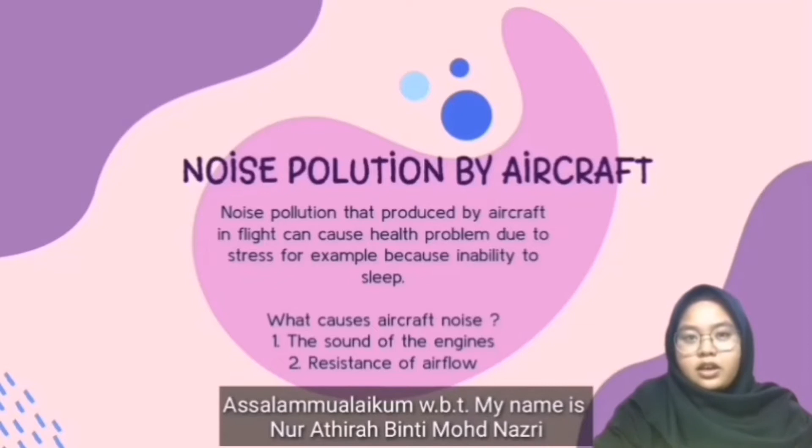Today we will present about the noise pollution at the airport. The first one is about the noise pollution from the aircraft. The noise produced by the aircraft during their flight can cause health problems such as stress because of inability to sleep. More issues about the health problem will be presented by Fatihah.

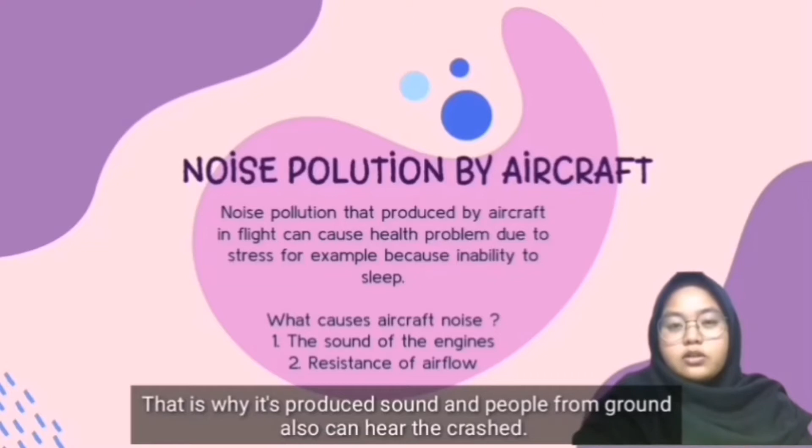What causes aircraft noise: first is the sound of the engines, especially when they are taking off from the airport and landing at the airport. Second is the resistance of the airflow, which is when the aircraft is flying, it will crash with the wind. That is why it produces sound, and people on the ground can also hear that crash.

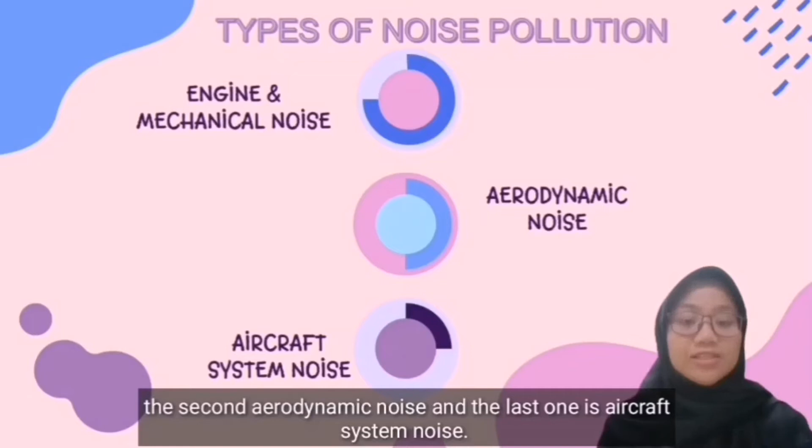For engine and mechanical noise, it is the main source of aircraft noise. It comes from the rotation of the engine parts, and it is most noticeable when the fan blades or propeller reach supersonic speed. Moreover, the aircraft gas turbine engine also contributes to noise pollution during takeoff.

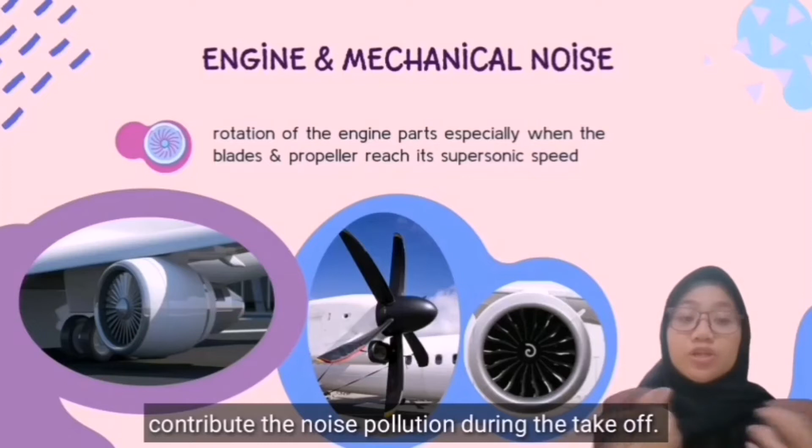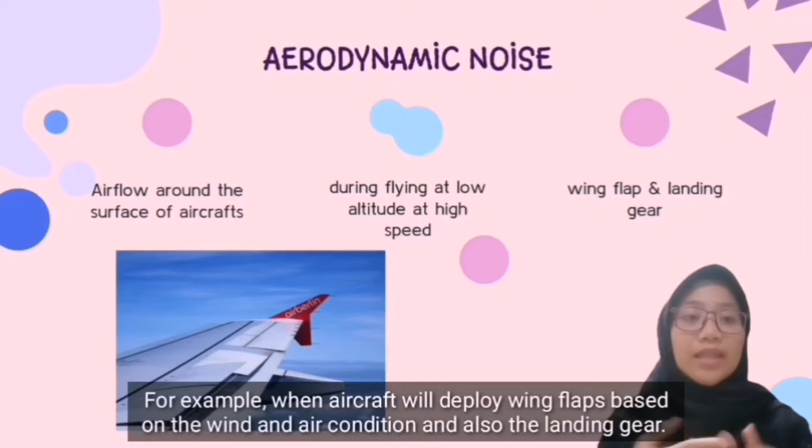The second one is aerodynamic noise. It comes from the airflow around the control surfaces of the aircraft, especially when the aircraft is flying at low altitude at high speed, due to the density of air. This produces loud aerodynamic noise, for example when an aircraft deploys the wing flaps based on wind and air conditions, and also the landing gear.

The last one is noise from the aircraft system. Three things contribute to this: the cockpit or flight deck, cabin pressurization, and also air conditioning systems.

The most significant source of cabin noise in commercial jet aircraft is named the auxiliary power unit, which is a generator used to start the main engine.

So all of these contribute to the noise pollution at the airport. That's all from me, thank you.

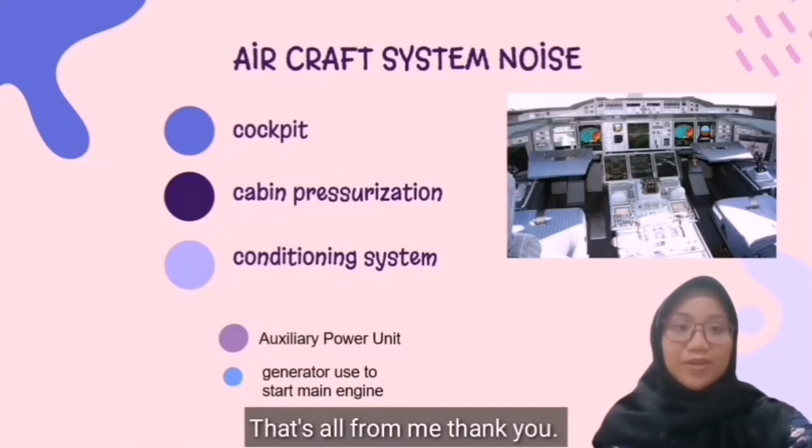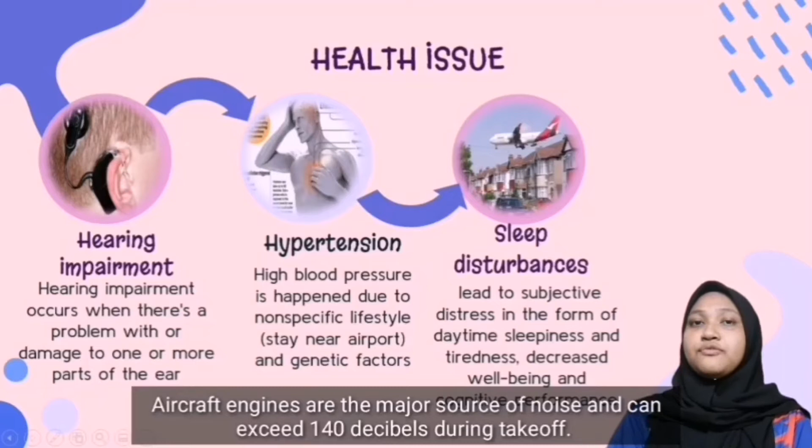The next thing is the facts about what will happen to the community in terms of health issues. Aircraft engines are the major source of noise and can exceed 140 decibels during takeoff. While airborne, the main sources of noise are the engines and the high speed turbulence over the fuselage, the main body of an aircraft.

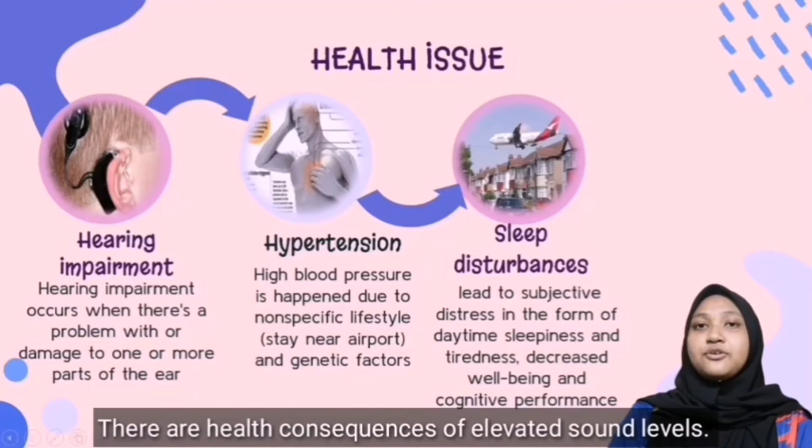There are health consequences of elevated sound levels. Elevated workplace or other noise can cause hearing impairment, hypertension, sleep disturbance, and etc.

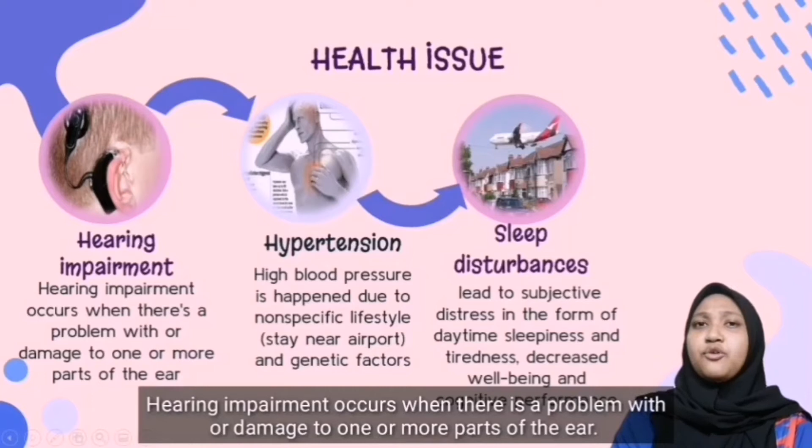The first health issue is hearing impairment, caused by the sound of airplanes, which can lead to hearing loss. Hearing impairment occurs when there is a problem with or damage to one or more parts of the ear. Aviation workers like pilots, mechanics, cabin attendants, and baggage handlers are exposed to these dangers because of constant noise exposure.

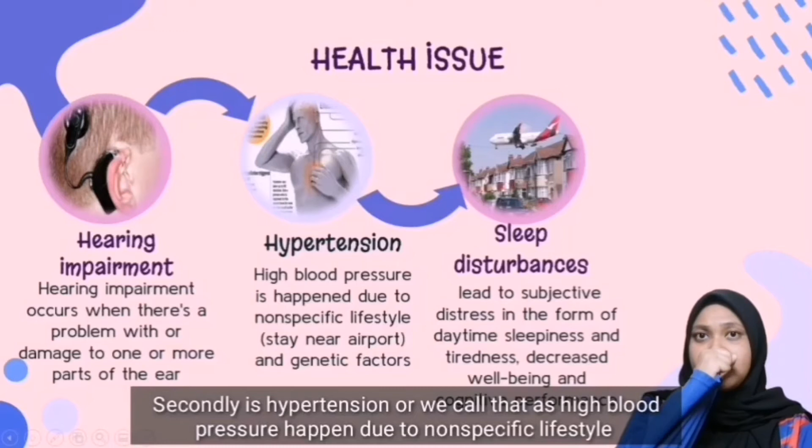Secondly is hypertension, or high blood pressure, which happens due to non-specific lifestyle factors like staying near the airport, working at the airport, or hanging out at the airport, or due to genetic factors. Airport noise has been linked to high blood pressure.

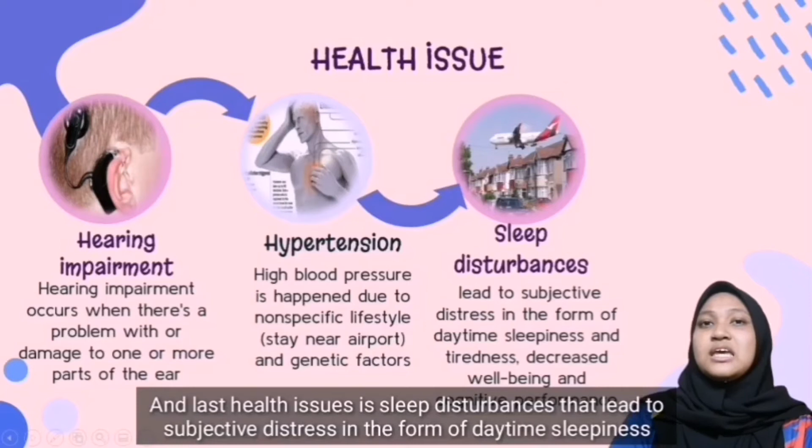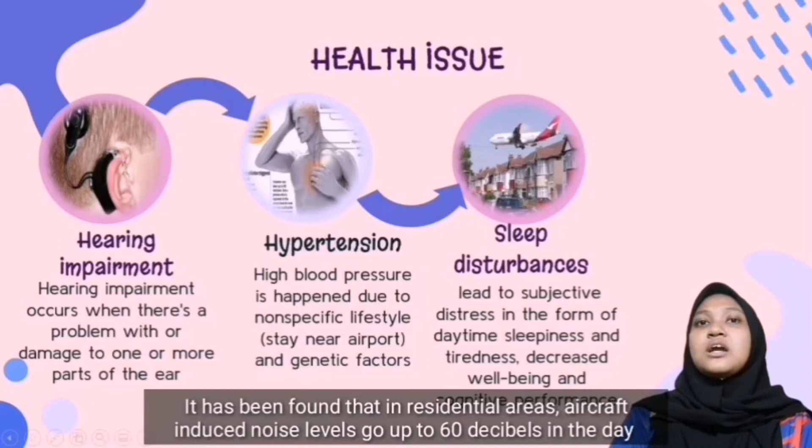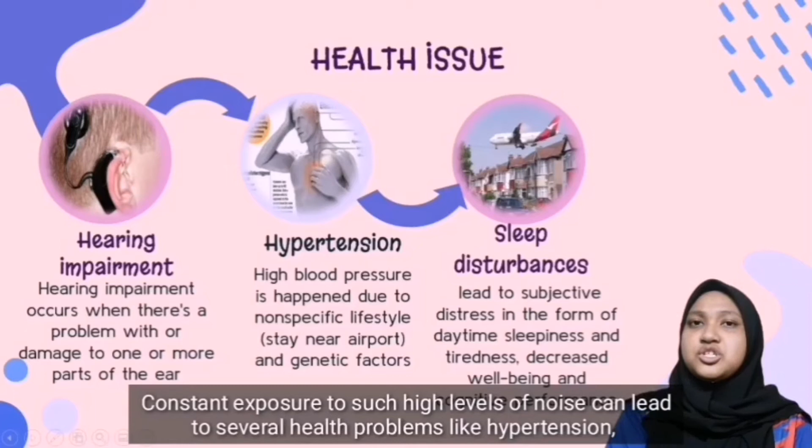The last health issue is sleep disturbance, which leads to subjective distress in the form of daytime sleepiness and tiredness, decreased well-being, and cognitive performance. This issue occurs especially to residents who live near the airport. It has been found that in residential areas, aircraft-induced noise levels go up to 60 decibels in the day and 45 decibels at night. Constant exposure to such high levels of noise can lead to several health problems like hypertension, hearing impairment, heart problems, sleep disturbance, and irritation.

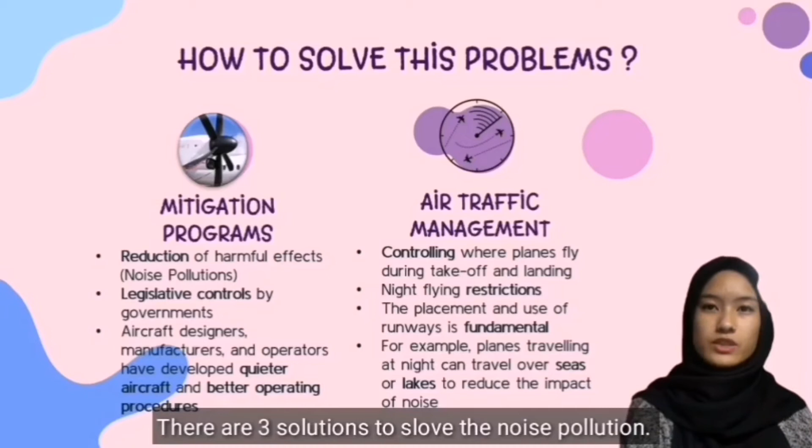So, how to solve the noise pollution? There are 3 solutions to solve the noise pollution. The first one is mitigation programs, the second one is air traffic management, and the third one is technological advances.

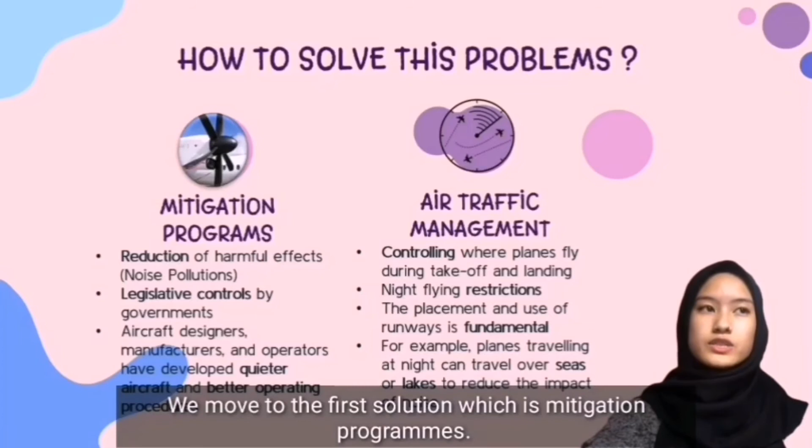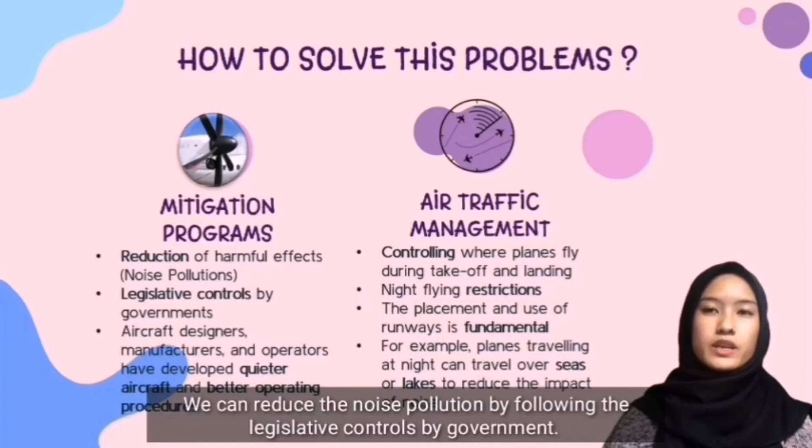We move to the first solution, which is mitigation programs. It involves the reduction of harmful effects, especially for noise pollution. We can reduce noise pollution by following the legislative control by governments. Aircraft designers, manufacturers, and operators have developed quieter aircraft and better operating procedures.

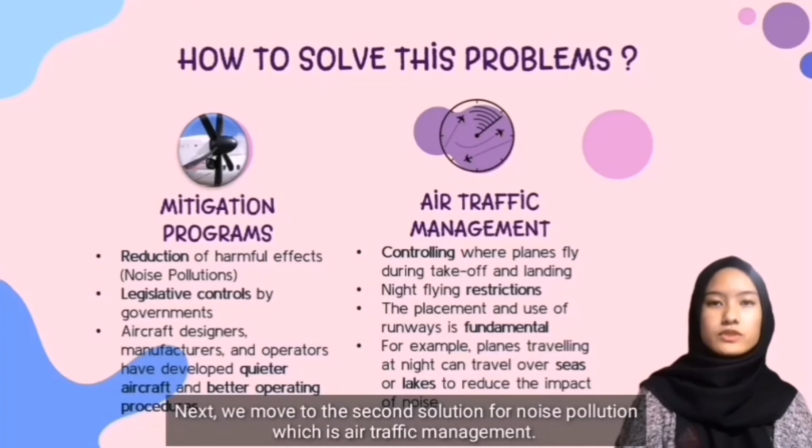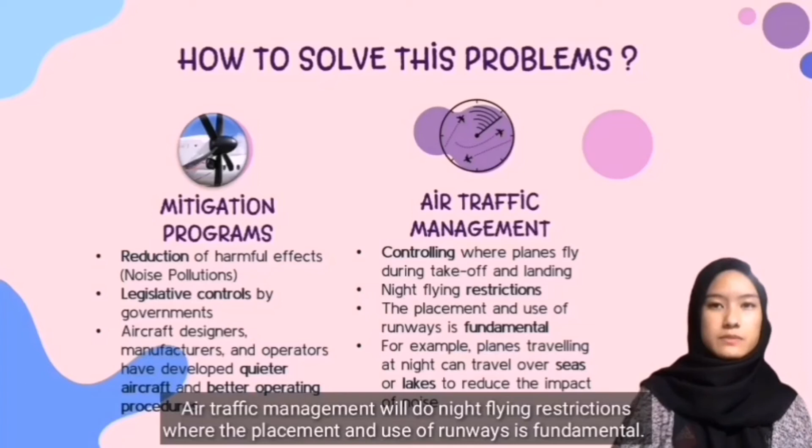Next, we move to the second solution for noise pollution, which is air traffic management. It involves controlling air traffic activities where planes fly during takeoff and landing. Air traffic management will do night flying restrictions, where the placement and use of runways is fundamental. For example, planes traveling at night can travel over seas or lakes to reduce the impact of noise.

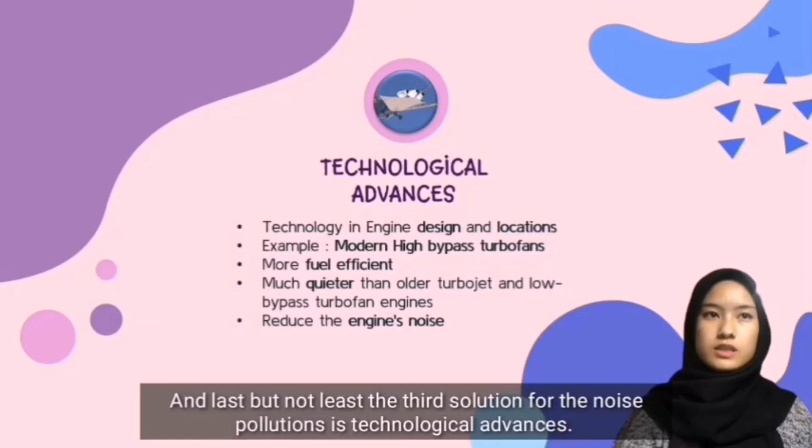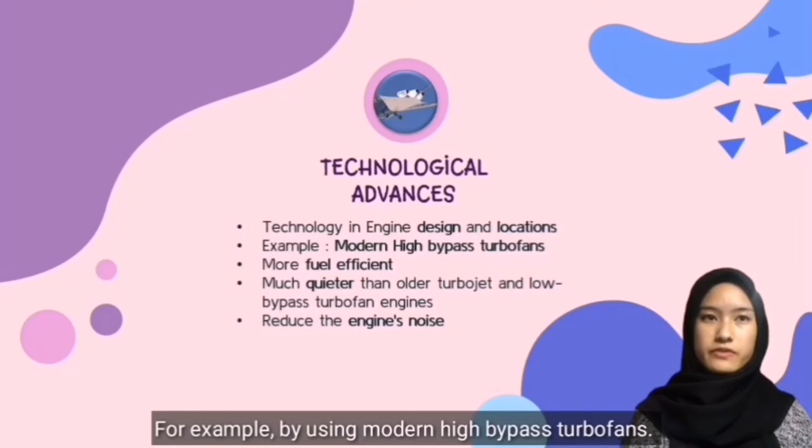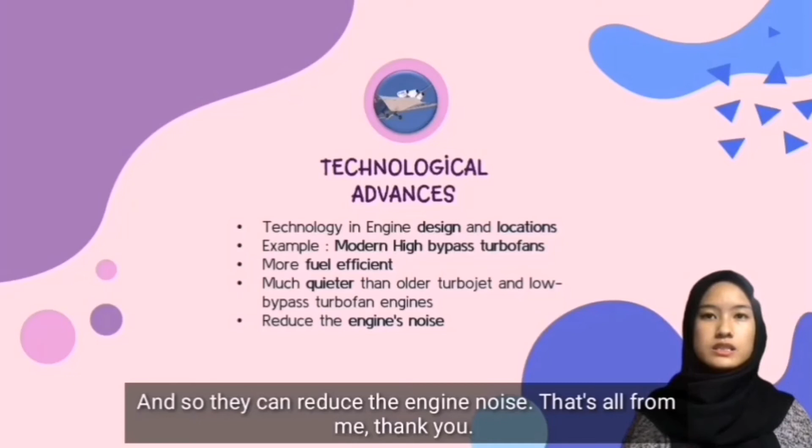Last but not least, the third solution for noise pollution is technological advances. It involves the improvement of technology in engine design and location. For example, by using modern high bypass turbofans, it will be more fuel efficient and much quieter than older turbojet and low bypass turbofan engines, and can also reduce engine noise. That's all from me, thank you.

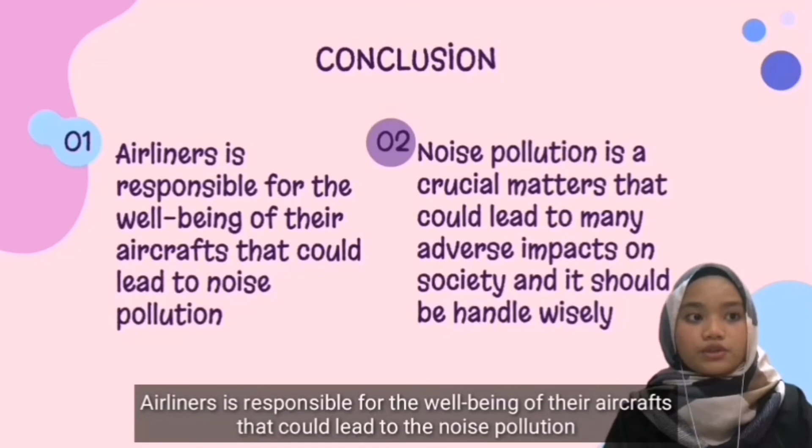So, from all of the things that have been presented by all of the presenters, the conclusion is that airliners are responsible for the well-being of the aircraft that could lead to noise pollution. And the second one is noise pollution is a crucial matter that could lead to many adverse impacts on society, and it should be handled wisely. That's all from our group.